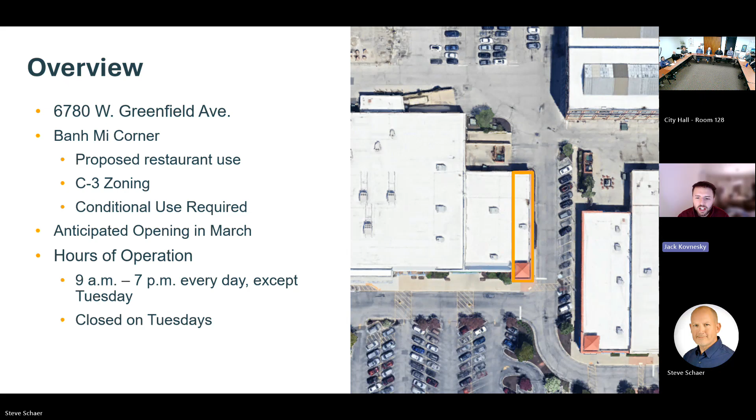Thank you. So this is Banh Mi Corner at the West Allis Town Center at 6780 West Greenfield Avenue, directly next to the existing Dollar Tree. Proposed as a restaurant serving Vietnamese fare, including banh mi sandwiches, milk teas, fruit teas, boba tea. This requires a conditional use permit. Anticipated opening is in March. The proposed hours of operation are 9 a.m. to 7 p.m. every single day except for Tuesday. The business will be closed on Tuesdays.

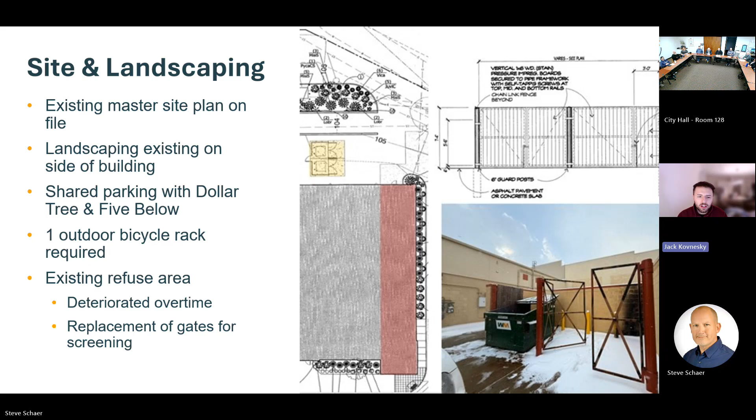And as you can see, it's right by that, across from that Five Below, and then also that Dollar Tree it's adjacent to. There is an existing master site plan on file from when the West Allis Town Center was redeveloped in about 2009. Landscaping is existing on the side of the building running along that driveway. There is shared parking with Dollar Tree and Five Below. One thing to note is that there is no existing bicycle parking required per code. At least one outdoor bicycle rack will be required. The existing refuse area, staff inspected this, and we noticed that over the years it has deteriorated with the wooden posts and slats on the gate missing. So we asked for a replacement of those gates for screening.

Looking at the floor plan, there's 32 indoor seats for patrons. They're met with a cashier counter for carryout service. There is no wait service at this restaurant, it's primarily just fast casual style. There is a small preparation area that's visible to the public. And then running down that hallway, there's 2 restrooms, an office space, and then the rear exit.

Additionally, there is a 510 square foot kitchen, and then also storage and supplies rooms. And then this connects directly to the rear trash refuse area.

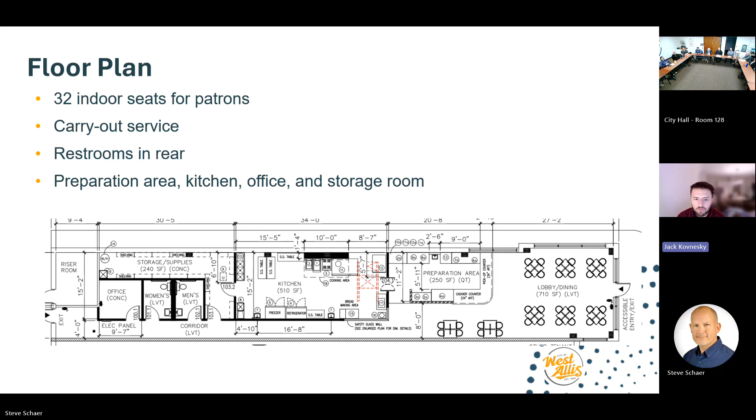There's not much else to say for this site other than that staff is recommending approval of the conditional use permit for Banh Mi Corner and the site landscaping architectural design review, subject to Common Council approval, revised site plan showing those enhancements to the screening of the existing refuse area, public bicycle rack being added, and then also if there's any signage and lighting plans being reviewed by the Planning and Zoning Office, subject to permitting. Thank you.

Thanks, Jack. Second. We have a motion, we have a second. Any questions? Is there anyone here representing the project? All in favor? Aye. Anyone opposed?

Items 2A and 2B are approved, and we will move on to items 3A and 3B. Toros Sports.

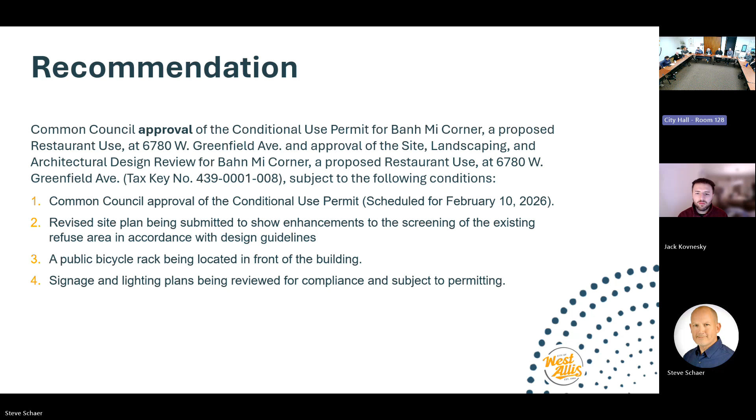Thank you, Mayor. Toros Sport Complex is at 6014 West Madison Street. As you can see, here's the former indoor gymnasium for the former St. Mary's congregation that existed in West Allis. They are occupying 2 lots within the city.

One lot for that existing gymnasium and cafeteria area, and then also a lot serving as parking space. Shown on the image are the 2 yellow locations. The proposal is for a multi-use facility, an event space serving cultural events, weddings, baptisms, and then also the gym serving indoor recreation from sports between basketball and volleyball and other sports.

There is a kitchen on site. However, in the staff report, we incorrectly included that there is a restaurant. Restaurant will not be included for this use. It's just the event space and indoor recreation.

C2 zoning for this property. The event space being over 5,000 square feet does require a conditional use permit. The hours of operation for the event space, which includes the baptisms, cultural events, and so on, are Monday through Friday, 10 a.m. to 12 a.m., Saturday, 10 a.m. to 1 a.m., and on Sundays they're closed.

For indoor sports and recreation, the proposed hours are Monday through Saturday, 8 a.m. to 12 a.m.

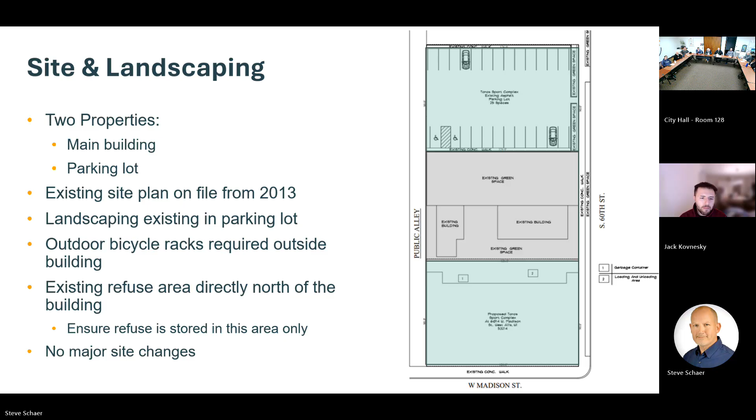And moving on to the next item is parking. We've received some concern due to this being a public hearing that needs to go before Common Council. We received some concern of parking during high volume events. We want to ensure that parking concerns are alleviated by the applicant.

We know that there are 25 parking stalls in the off-street lot. However, during high volume events, we may anticipate that more than 25 cars will be utilized. Staff is recommending that an off-street parking plan is created, utilizing existing properties nearby, ensuring that parking does not largely occur in the neighborhood, maybe on 60th Street. One suggested site is the Wells Fargo parking lot. That is a very large parking lot that is largely underutilized, especially on weekend dates when high volume events may occur. So we just want to work further with the applicant on this.

However, we don't have parking minimums for this. We have parking maximums. So that is just something we want to consider.

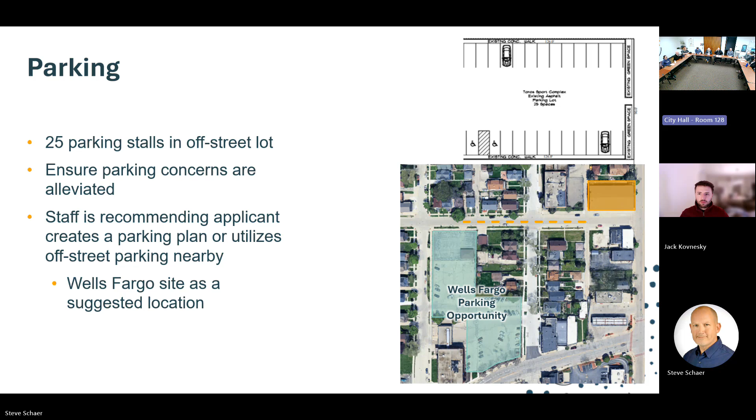There's also an additional green space adjacent to their parking that also belongs to them, and they're envisioning increasing it for a parking lot. However, we need to generate funds to be able to proceed with that route. In the last 2 days, the owners have been in touch with the bank to see if they could lease the space for parking. They had to go through a couple of channels with corporate before they respond about the parking.

There was also a concern about fire safety, and by decreasing the capacity in half and providing fire alarm throughout the whole system, our understanding from the fire department is that we will be in compliance with the requirements.

In regards to social events in the lower level, the owners of this building also have a restaurant on 84th and Lincoln and 2 additional restaurants on the near south side. They mainly cater to a specific region of the country. He also coordinates soccer events. So the idea is to have this building provide a space for social events, because currently they rent spaces in churches and things like that. They want a permanent space.

Even though the lower level provides space for 240, 245 people, they do not envision having that volume of people. They think that weddings or social events will fluctuate between 90 and 180, but will never exceed that volume. We hope that they can have the lower level occupied during the weekends, and hopefully social events during the day, but they don't anticipate bringing in that volume of people.

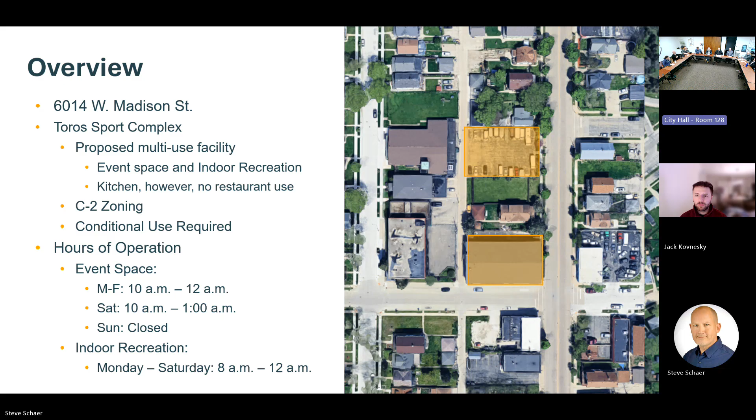My understanding based on the code is that if you have an existing building and you do not disturb it as is, then we're in good shape. If we were to do alterations or modifications, the code indicates that for every dollar spent on alteration, you need to spend 20 cents on an ADA upgrade.

In this case, regarding ADA, the building is bi-level. As soon as you open the door, there's a set of stairs to the lower level and the upper level, so the feasibility of a handicap ramp doesn't exist. The building has adequate safety with a set of stairs in each corner, and based on conversations with the fire department, if we provide a complete fire alarm system, we'll be in compliance for the level of safety based on the volume of people.

Now, what about a first aid station? I don't see that on the floor plan. Is that something that should be taken into consideration? Steve, applicant, or Jack?

You mean like if somebody gets injured, you have a room with bandages? Yes sir, I'm sure we'll be having that, it's up to you guys. I don't think that's typically required—it's not something code enforcement or planning would require, but it's a good idea to have people with AED devices or bandages, whatever it may be.

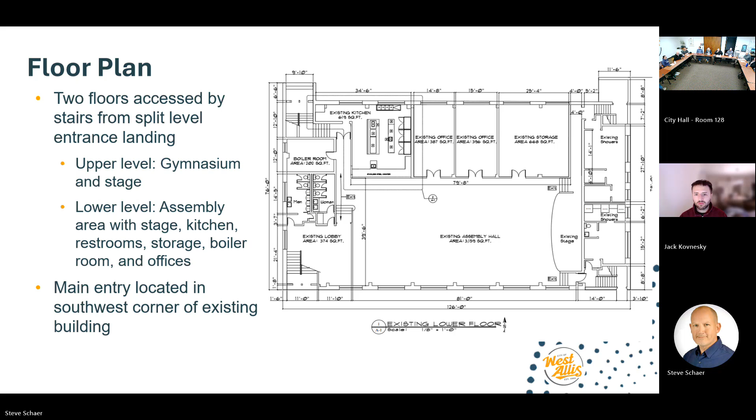So we have before us today, Cars R Us 2 at 10920 West Lincoln Avenue. As plan commissioners may note, this is very similar to a previously approved wholesale automotive dealer at 10150 West National Avenue. It's essentially the same thing.

We did have a question from the mayor if this is something that we see as a trend. We have not seen many wholesale automotive dealers. This is just coincidence, we believe. So just wanted to get a little background on that.

The property is zoned I-1. Wholesale automotive dealers are considered light motor vehicle sales uses, so a conditional use is required. The hours of operation are Monday through Saturday, 3 p.m. to 9 p.m. This is that former Henry Schein Dental building.

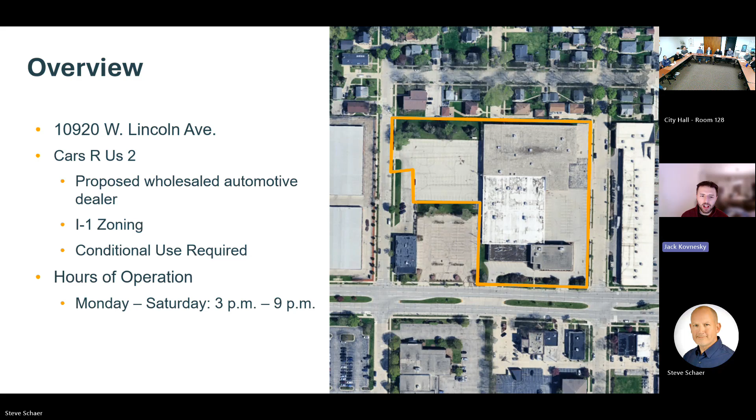I believe we've seen this come across Plan Commission for site plans before. Like the previous one, this business will not be selling vehicles to the general public and will not maintain an outdoor vehicle lot. So no maintenance, storage, or staging of vehicles will occur on site.

The office-based wholesale operation includes purchasing vehicles from auctions or public markets, for resale to other licensed dealers, and then the office space is largely just for that administrative work and meeting with clients for transactions. No interior or exterior changes are proposed at the site or building.

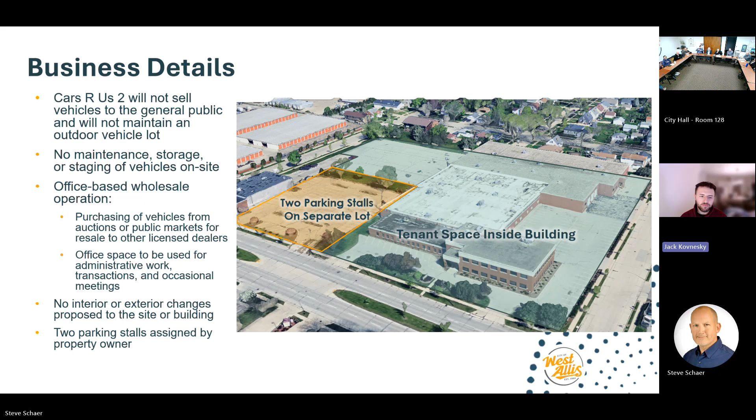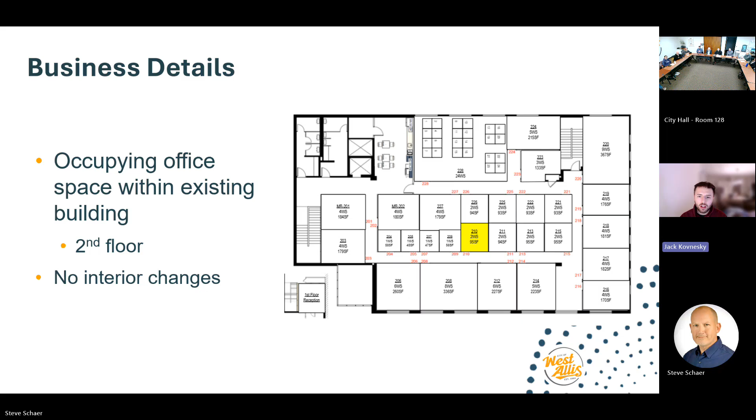Two parking stalls assigned by the property owner are on the other lot, shown in yellow here. These are owned by the same property owner, it's just 2 separate lots at the moment. They are occupying suite 210 on that second floor. No interior changes are proposed here. So it's just a simple office space, looks like 955 square feet.

With that being said, we are recommending approval of the site, landscape, and architectural design review for Cars R Us 2, subject to common council approval, and then that conditional use permit limitation, limiting the use to a maximum of 2 parking stalls for business-related purposes. Anything higher than that will be against the conditional use permit, along with no mechanical work on site. And the area was recently landscaped, so we request just a continuation of property maintenance for that landscaping.

Thank you. If you have any questions, I don't know if Antoine, the applicant, is there, but if you have any questions, let me know. Thank you. Thank you, Jack.

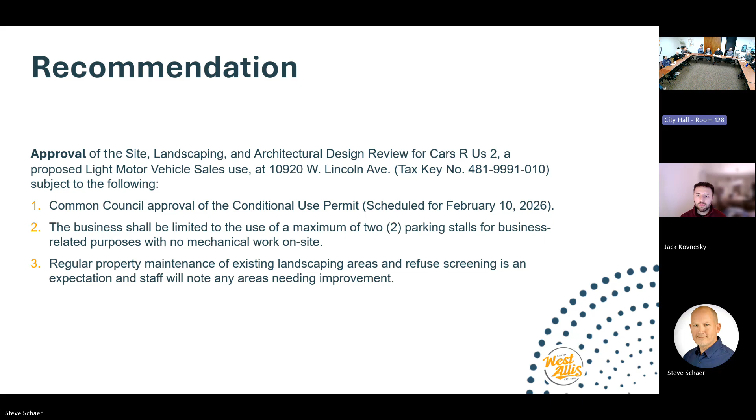Any questions? I'll move to approve. Second. Motion and a second. If there are no other questions or discussion, all in favor, please say aye. Aye. Any opposed? Ayes have it. Carries. Item is approved. We'll move on to item 5.

Mayor, next item is Habitat for Humanity and the City of West Allis are endeavoring to partner on an agreement for 2 properties at 69th and Beloit. These are currently owned by the City of West Allis, and if you recall, in 2024 we used community development block grant funds to remove an old tavern on this site. It was called Czar's Bar on the corner.

With that bar removed and the site cleaned up, pad ready, the CDA had directed staff to proceed with a plan to put out an RFP and build a house, or 2 houses, on each of the lots. We consulted with some private sector developers and builders, and we received one bid. The bid to build one house, basically a 3-bedroom with a bonus room, 2 stories, was over $400,000, about $416,000 to build.

That exceeded the subsidy limit, or the value limit, that we're allowed to use with federal funds. So we're in a bit of a dilemma. We went back to the CDA and shared that information, and they directed us to take a look at other options. So we had a meeting, I think, the year prior, and then more recently with Habitat for Humanity, and Brian, Beth, and Yuli are here representing Habitat for Humanity. They're here to answer any questions, but I'll just dive into a short presentation we have prepared here.

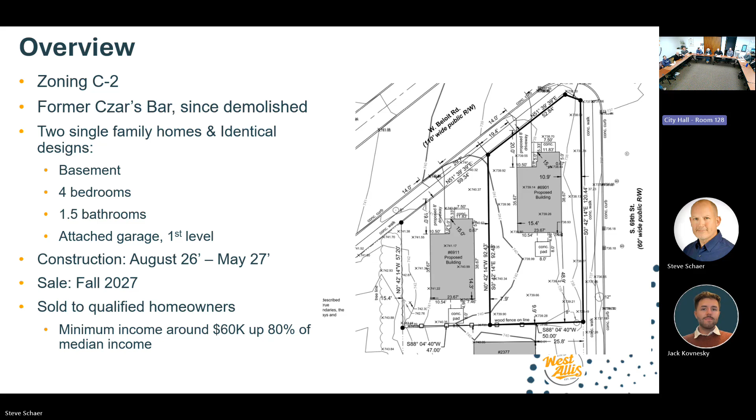The construction phasing - they hope to start construction this year, in the summer of 2026, and finish up in the spring of 2027. The sale would take place in 2027 to a qualified homeowner that meets the affordability requirements. Habitat would manage that process, as these properties would ultimately be sold to Habitat as part of an agreement and then built upon. The minimum income typically is right around the county median income, roughly $60,000 up to about 80% of median income.

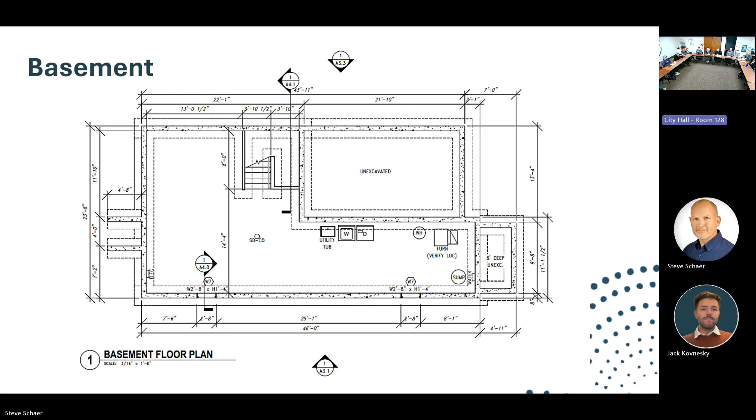So just the basement floor plan, again just sort of utility in mind: wash tub, washer dryer space, furnace, water heater, sump pump. Staircase - that same staircase goes up through the two floors all the way up to the second floor.

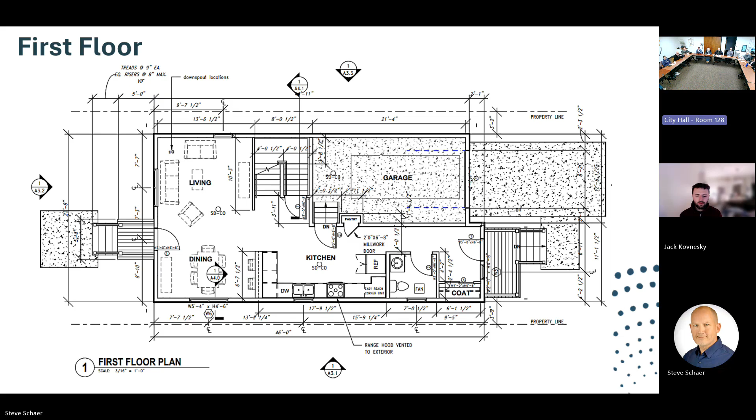Coming into the home, into the kitchen area, that's where you have the connection between the kitchen, the front living room area, half bath, and dining room, living in the back of the house. This front area is more or less a foyer, coat closet, and walking past the half bath, kitchen, the flow out to the back door of the building.

The second floor is also accessed from that main central staircase. You have your four bedrooms upstairs, plus an additional open space here to the corridor for a small office, home office, or play area, however the family sees fit. But the bedrooms all have closets and access to that full bathroom on the second floor.

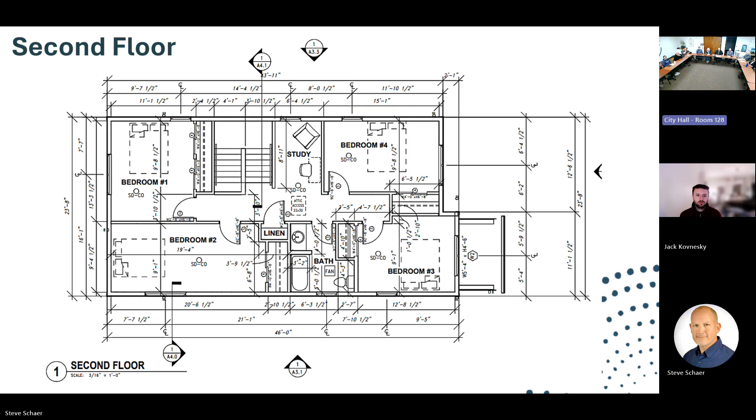In terms of architecture, the exterior of the building, it was important - I think what the city wants to see in this neighborhood is that it best meets the look of the neighborhood. And in general there isn't really one defining type of architecture in the area, but you get a mix of bungalows, ranch homes, two-story buildings. So this building is very consistent with that range of products that already exist in that neighborhood.

They've added, at staff's request, a shake style vinyl siding on the front and back gables of the building. They've incorporated a front porch on the front of the building and an attached garage. The window patterns throughout the exterior have ample windows on all four sides of the building.

The rear of the building - there's some push from the city to do a covered rear entryway, somewhat similar to the front of the building, with that sort of overhanging shelter hip roof off the back of the building as well. Then there will be a small concrete pad behind the building for a small patio area, the landing of those rear steps, and equally a walkway up to the front door from the public sidewalk.

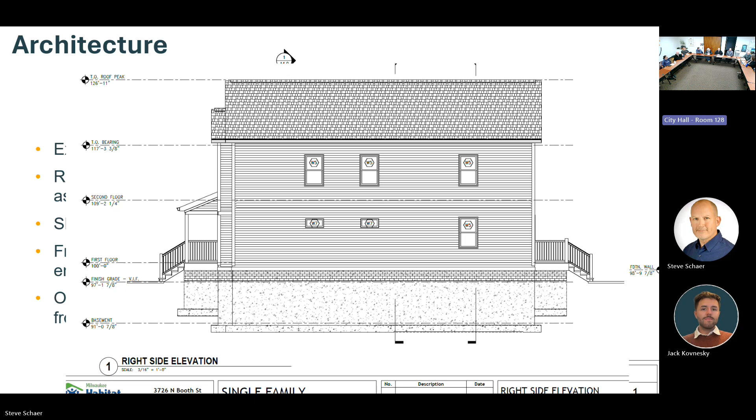Item number 7 is a site landscaping and architectural design review for ABC Automotive. We're looking at 1462 South 81st Street, not too far from here.

The applicant is ABC Automotive, and they are proposing a light motor vehicle service use at this location. The current operations of this site, at least previously, were Bud's Transmission. Bud's Transmission has been out for a few months, though it hasn't been greater than a year at this point. The zoning of the site is C2, and a light motor vehicle service use here is going to be considered a legal non-conforming use. So under traditional zoning, not typically permitted, but because Bud's Transmission hasn't been out for more than a year, ABC Automotive would be allowed to occupy this site.

Currently, ABC operates out of 8705 West Greenfield Avenue, and they're essentially looking to relocate a good portion of their business operations to this new site. So they're looking to relocate the auto diagnosis, inspection, steering, suspension, and all of those operations to this new location, and just keep the auto detailing and bodywork at their previous location. But they are looking to operate both locations still.

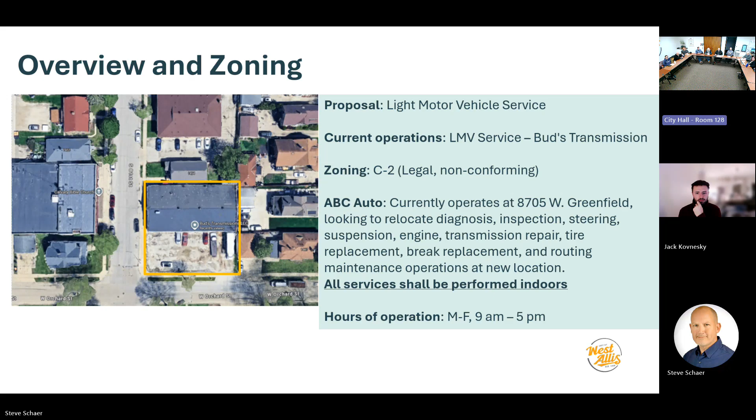We have come to an agreement with the applicant that all services at this new location should be performed indoors, in consideration of the neighborhood scale and context of the area. Proposed hours of operation for ABC are Monday through Friday, 9 a.m. until 5 p.m. Overall, it's a 7,000 square foot building located on a 13,000 square foot lot.

A grand majority of the extra space on this site is dedicated to a parking lot, which is set to be repaved. I don't know if any of you have driven past the site in summertime, but I drove past and did an inspection in winter. During the summertime, you can see there's a lot of pitting and cracking of the asphalt to the point where it's almost not drivable. So it's an awesome investment being made to this site. However, we are looking for further details to understand the scope of repaving, whether we're going down to bare ground or just looking at a resurfacing job.

Additionally, we'd like to check out some of the slopes on the site to make sure everything checks out with our engineering department as well. Overall, they're proposing 12 parking stalls on site for this parking lot and 1 ADA stall.

Proactively, the business has decided to do bicycle parking as indicated on some previous plans. Three stalls are indicated for the business, but it's still a little up in the air what kind of bicycle parking they'd like to pursue. On behalf of the city, we are offering the potential for a city-sponsored bike rack. However, that would have to be located in the public right-of-way, whereas any private rack we would try to locate closely to the customer service entrance of the building.

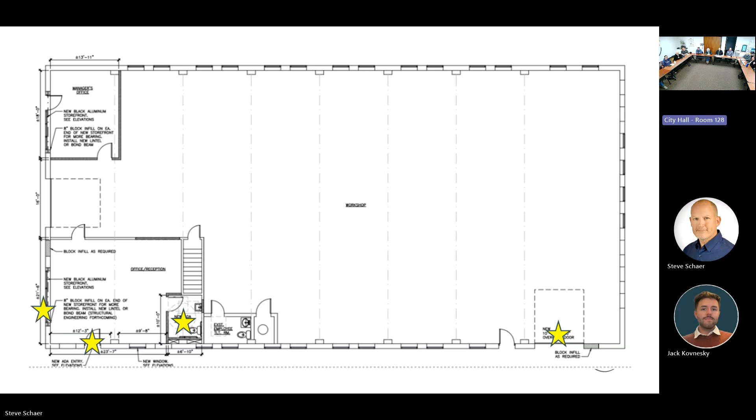We kind of see these indicated on the stars here. Furthest to the left is the location of the old entrance, which will be moved now to the middle of those three stars on the left—that'll be the new entrance. Also starred is the new ADA bathroom stall, and then toward the very end of the site, we'll see that new overhead garage door with a new shed dormer as well.

Largely, these architectural plans submitted also mirror the proposed changes indicated on the floor plans, with some notable changes. The building will be repainted—hooray, it's in some considerably diminished condition right now. We'll see it repainted in Rust-Oleum white with sunrise red and royal blue striping. Our recommendation, potentially to be more compatible with the neighborhood scale, would be to either tone down the accent colors in saturation or in the size and location in which they're painted. We definitely love the red, white, and blue theme they've got going on, but potentially we could see decreasing that striped area, just striping the front of the building.

We're definitely open to talking with ABC a fair bit more about that, just so things look more neighborhood-residentially scaled. We also see that new shed dormer I mentioned placed over that overhead door, as well as that parking repavement detail, which we do need some additional info on.

Notably, the site has been indicated by code enforcement as needing some property maintenance. Specifically, they note that the exterior building surfaces—roofs, chimneys, walls, foundations, overhangs, essentially whatever pertains to the site—shall be maintained in good repair so as to prevent deterioration and preserve the visual aesthetic and character of the neighborhood. We know, based on popping out there real quick, that there are a few minor roof line repairs needed.

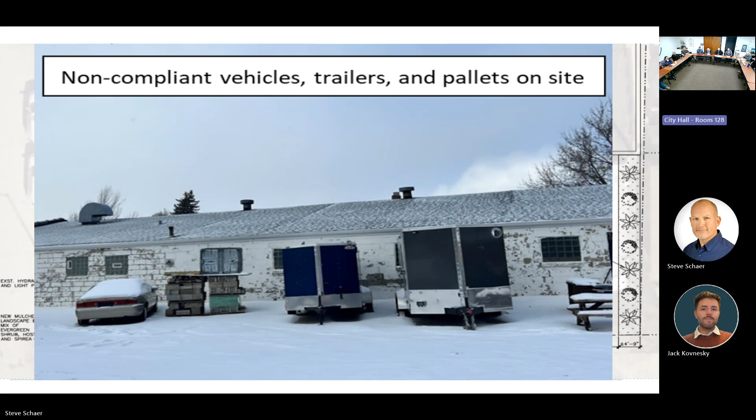Any other questions from the commission? Is there a motion? I'll move to approve. Second. Okay, we have a motion, we have a second. If there's no other discussion, all in favor? Anyone opposed? I say that motion carries, with one abstention.

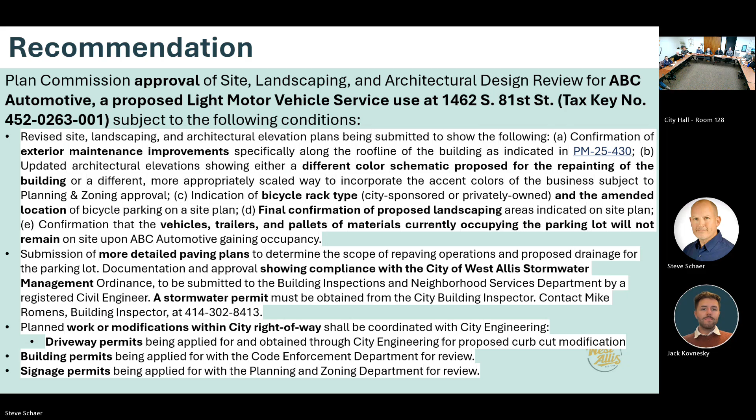And then we can move on to item 8. Right, yeah, that is also me. So we're looking at another SLA, but this time for Pretty Paws Pet Spa. We do have an applicant, Kayla, and her partner here today to answer any of your folks' questions should they arise. We're looking at 2060 South 61st Street.

Overall, Kayla and company are proposing a pet spa and doggy daycare at this site. It's not a daycare, it's a kennel - sorry, we're not gonna do daycare, pet boarding. My apologies, that's my bad on the PowerPoint side of things. I think the staff reports got it right, but the site was previously used by Villa Family Living Centers as a storage warehouse for furniture for senior living facilities.

Overall, for the zoning, we look at things with the more intensive of the two uses, so we are categorizing this as pet boarding, which is a limited use within the I-1 zoning district. The limitation imposed on pet boarding here is that it's permitted if no noise from the activity is audible from a lot used for residential purposes. So that's the biggest contention or consideration with the site - its proximity to residential uses. But after an application meeting with Kayla, we have a pretty good handle on a plan for what to do should any issues arise.

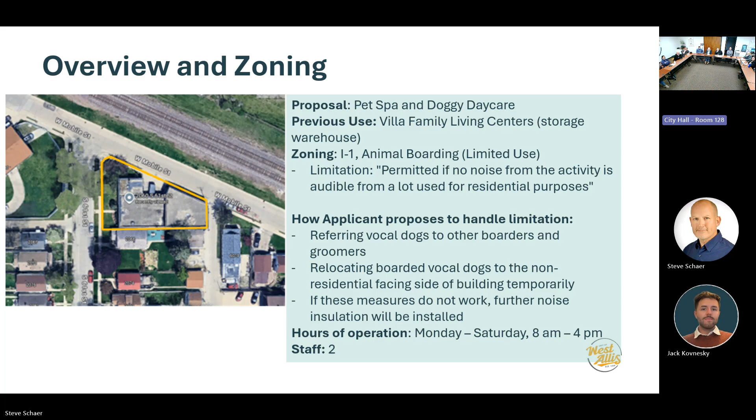Overall, there are no major changes proposed for the site plan. The 6,300 square foot building is fairly considerable on the site and takes up a large majority of it. In terms of some lines of inquiry, we ran down with Kayla.

We had inquired whether they would be proposing any outdoor dog run or kennel situation. The answer to that is no. Everything will be enclosed indoors.

For landscaping, there's a lot of quite nice existing landscaping on the site, especially located at the intersection of Mobile Street and 61st Street. Some minor maintenance is anticipated. They'll find out more in the springtime if they have to trim the hedges or knock anything back a bit. But overall, some of the pictures we've seen from the summertime look really nice on site.

Refuse is planned to be located within the building and will be rolled toward the alleyway for pickup. Employees will park on site in the 2 to 3 stalls available, kind of centrally located on the site, with customers utilizing the existing street parking on Mobile and 61st.

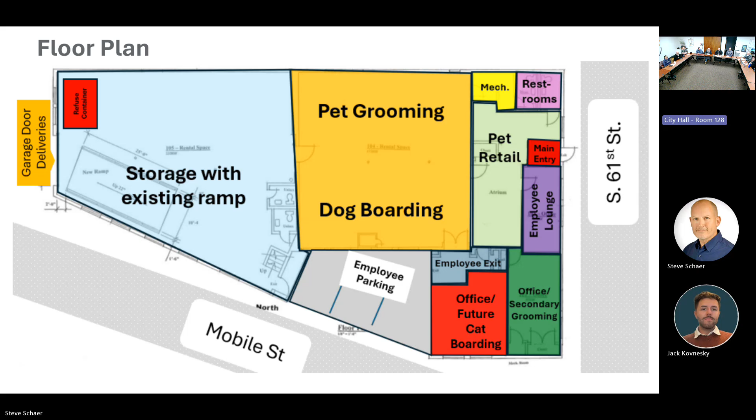Overall, we recommend approval for the proposed animal boarding use at 2060 South 61st Street, subject to a couple of conditions: confirmation of the exterior maintenance improvements we outlined, touching up the paint on the rear building facade, as well as a signage plan or potentially creative signage plan being submitted for design review and permitting if applicable. Kayla had talked through the potential for a section of the building to be an excellent use for a proposed mural in the future, but if anything is proposed, we'll run it past you folks for approval as well.

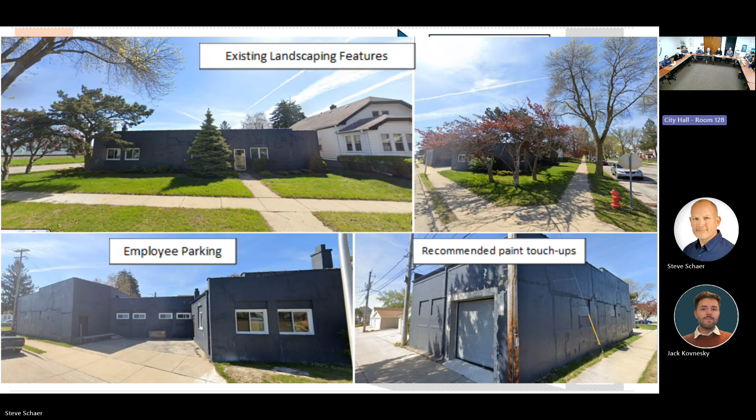So that's all I've got for you. If you have any questions.

Any security cameras to be placed on the site? We have to for safety reasons, plus if a dog got out, yeah, they'll be inside and exterior.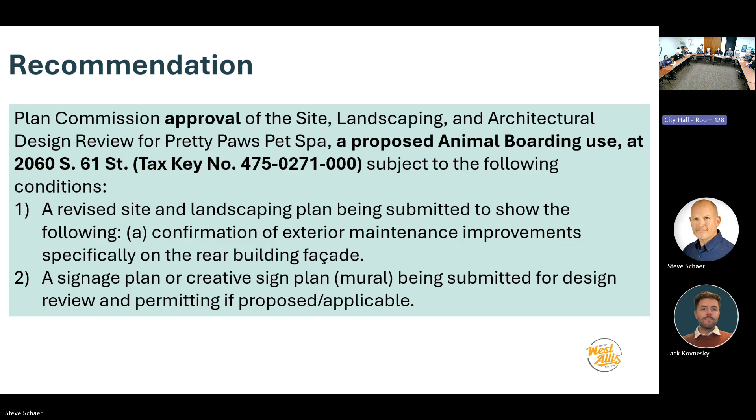Then we'll move to item 9, residential accessory buildings. So this ordinance has two parts to it.

In residential, for everyone's understanding, residential accessory buildings are one example here, not unlike this building. Typically, if you have a residential property, you have your house on that lot, and the city's zoning ordinance would allow you to build something along this line in your yard area, alongside or in front of or behind your existing house.

It has to be accessory to the principal use. There are certain parameters that it can't exceed a certain size. Height limit is on this first column. The first column is this accessory dwelling unit, which goes over the parameters where you have exterior wall height, with a maximum height of 20.

The height maximum of the overall building, not just the wall, but the overall height, shouldn't exceed the height of the principal building, not to exceed 20 feet. And then the building coverage is 50% of the principal building, not to exceed 800 square feet. Setbacks are 10 feet minimum from the main home, and then you've got the existing front, rear, and side yard setbacks as shown there.

The first part of this ordinance is to change that front yard setback rule. You can kind of see where the setback from, front yard setback minimum is 60 feet. So that 60-foot setback, in essence, pushes that future detached accessory dwelling unit to the backyard. In other words, if you have a house that was built previously, and your main house is set back far on the lot, and you don't have an option to build alongside or behind that existing home, this ordinance doesn't help you out much because the current standard for an ADU is 60 feet.

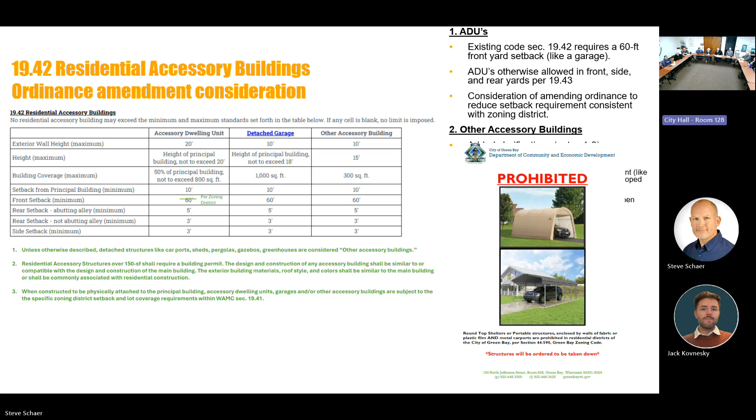Of course, it's understood, but I think there can be some minimum design requirements that don't allow, for example, the fabric hoop house, or the all-metal carport, which they took from Hobby Lobby and decided to install in their yards. It's those types of things we'd like to help avoid through this ordinance, and clarify further with some new language to table 19.42.

Then just some examples on that accessory dwelling unit setback, this is what it would look like. This is an example at 61st and Lapham Street, a corner lot about 60 feet wide. Lapham is up on top, and 61st Street is on the right side. Liberty Heights Park is across the street north of Lapham at the top of the screen. In this example, it's basically a double lot, and the duplex is built on the western side of that double lot.

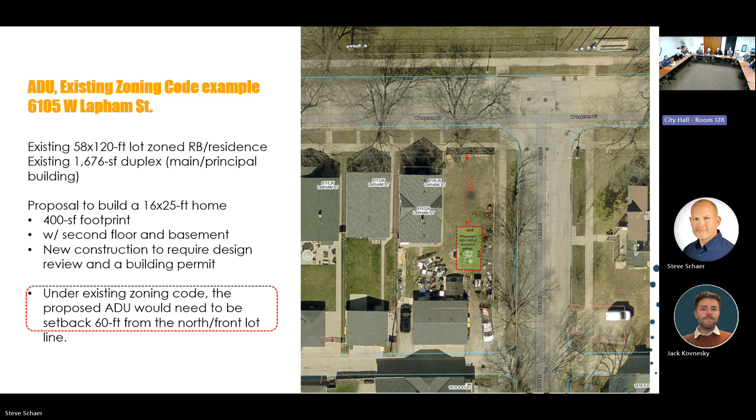In this case, the owner is interested in building a 400 square foot footprint accessory dwelling unit. Under the current zoning ordinance, you can build that accessory dwelling unit, but it's got to be set back at least 60 feet from the front yard. So there's a lot of green space out in front of that new home, and it kind of eats into the rear yard—you're going to see a lot of stuff in the rear yard. This is an older aerial image that's not there today, but it's a case in point of what would be allowed under the current code.

Under the modified or amended code, we can move that accessory dwelling unit closer to the front yard, again respecting the zoning district's RB 10-foot minimum setback requirement. It would be compatible with the homes along that stretch of Lapham Street, respective of the side yard setbacks between the main home and the accessory dwelling unit, and they would free up more space behind the home for rear yard activities.

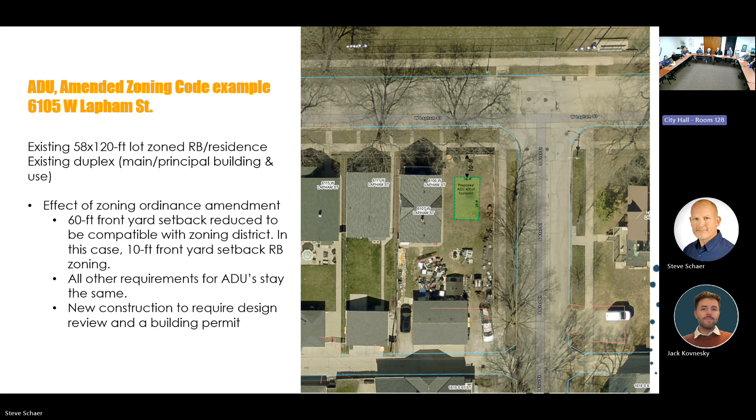That concludes the presentation. We are recommending approval of the ordinance amendment. It will have to go before the city council. We introduced it to the council at a prior meeting, and they were open to the idea of the change, but they wanted us to run it past you first. With your recommendation, we'll bring that back to council for consideration and public hearing.

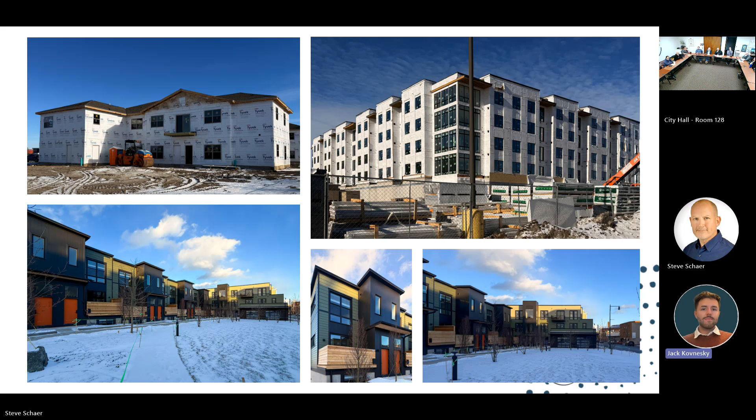Thank you, Jack. Any other questions from the commissioners? Need a motion to adjourn. We have a question, Mr. Mayor - you didn't get a second.

Some time ago, there was discussion about one of the city's objectives of having 70,000 population in a certain period of time. At the next meeting, could we have an agenda item where we get an update on how that's progressing? Population estimates - well, the population, I think the goal is for 70,000 people, correct? Correct, right, and I don't know if we're at 70,000 yet. We're not. I wonder how far we've slipped below 60,000.